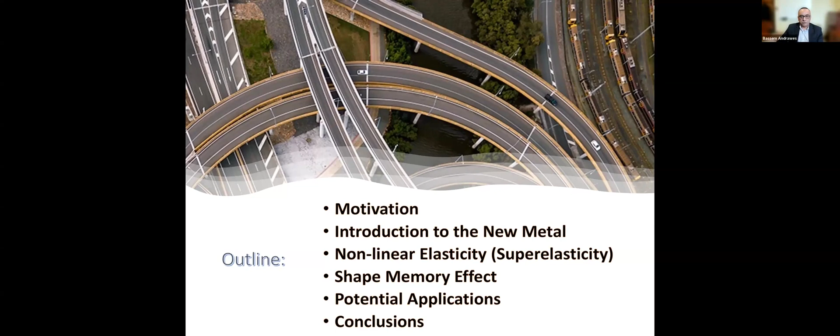Rather than going in one particular application for my presentation, I chose here to go through an overview of some samples of the work that we have been doing through TRANS-IPIC, especially here at the University of Illinois, related to SMAs, that would hopefully give you an idea about the potential of these new materials. And then I'm going to wrap up with the conclusions, of course.

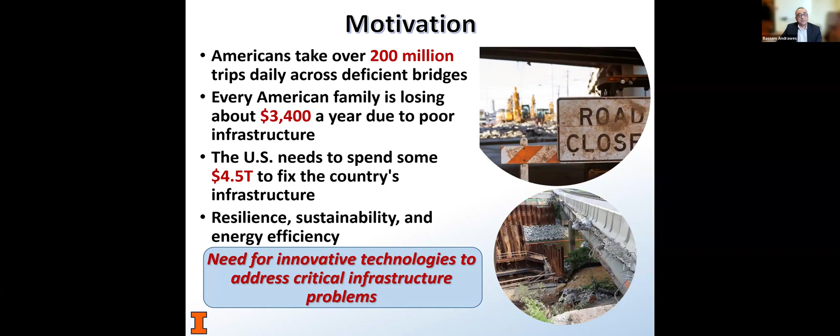These are all keywords that are floating around us whenever we attend a meeting, workshop, or conference, and they are very important keywords that we need to think about very carefully. We need to think about innovative ideas and technologies for the future. We can't just keep repeating the same technologies and expect the outcome to be different 50 or 60 years from now. Therefore, we are thinking about new materials, and that's the area I'm going to be focusing on today.

If I ask you a simple question, what would be the most material you would say is being used in our transportation infrastructure? I'm sure most of you will say concrete and steel, and you're not wrong about that. You're absolutely right. However, these materials are great and have served us well over the last century, even more. But it's not a secret that they have their own shortcomings and limitations. For example, concrete cracks in tension.

Steel corrodes. The concrete cracking even exacerbates the issue of steel corrosion. Steel yielding, some of us think of it as a blessing, which is surely a blessing for ductility, but when you think about resiliency, it's actually against resilience by definition. Also, these materials are stiff, rigid. They lack versatility and adaptability to the surrounding environment, whether it's the loading environment or even climate.

Now we're becoming more and more aware of the cost on the environment that producing these materials have. It's unfortunate that when we drive on our bridges here in the US and see images like the one I'm showing here in this slide, we become numb to it. We could become used to it. It shouldn't be the case, and we should definitely strive for a better outcome for our next generations and next generation of transportation infrastructure.

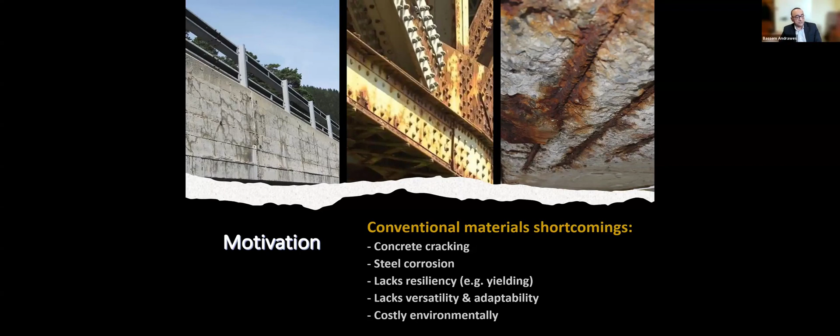Therefore, we started thinking about emerging and new materials like shape memory alloys. Let me declare very early on, we are not suggesting or proposing to replace existing reinforcement with these metals or materials, but rather to supplement existing reinforcement with them. Hopefully the examples I'm sharing today will highlight exactly what I mean by that.

So when we say new metal or SMAs, if you see it or feel it, it looks like any other metal. However, the unique thing about it is that if you deform it beyond its elastic range, the material can actually remember its original shape when subjected to temperature.

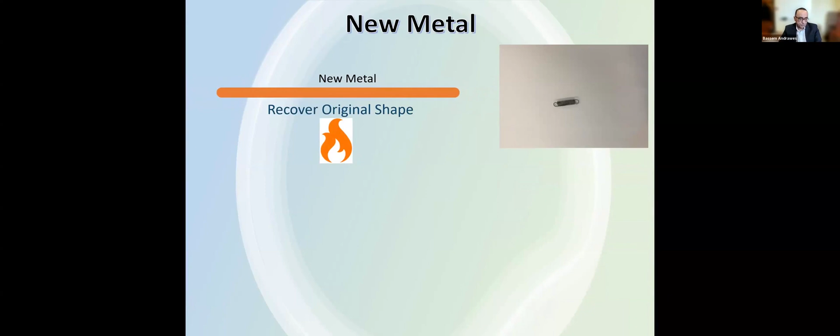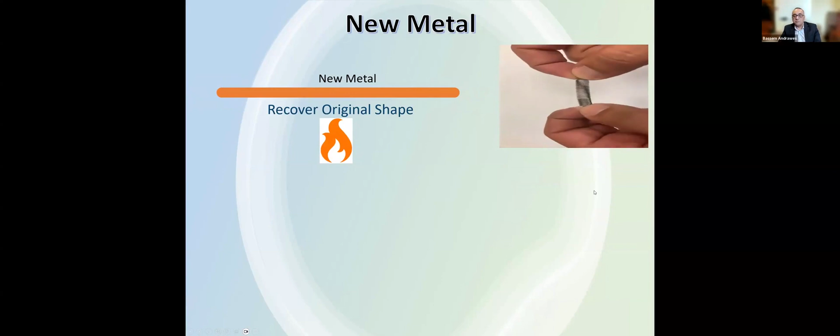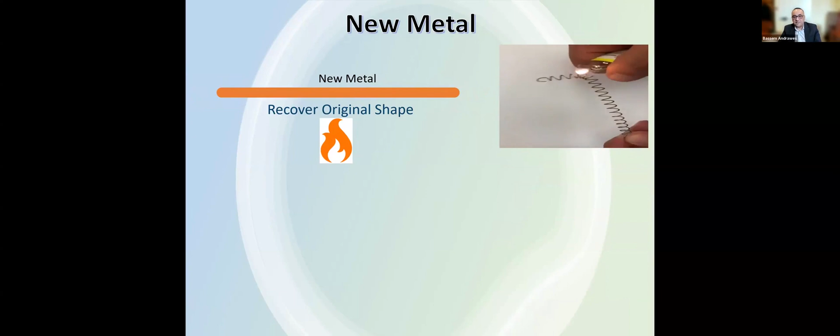If you haven't seen this in real life, I have a video here that shows me stretching a spring made of SMA beyond its elastic range. You'd think it's permanently deformed. However, wait until you see what happens when I subject it to some heat through this flame. It immediately starts recovering its original shape. The thing about it is that it can do this over and over again, the same spring. So it's a repeatable process.

SMAs are not new. They have been used in high-end fields for decades now, fields like aerospace, biomedical, and robotics, and they are becoming more popular than ever when it comes to commercial availability. They are found in the form of wires, bars, and sheets.

One important thing I want to point out is that SMA is not one type of material. It's actually a group or family of materials that exhibit more or less similar behaviors. For example, we have the nickel titanium family, from which nitinol comes, the most popular commercially available alloy on the market. We also have copper-based alloys and iron-based alloys, which really got civil engineering folks excited about using SMAs because they are more cost-effective. Our role in civil engineering is to choose the right alloy, or alloys, that work for us not only in cost but in durability and resiliency as well.

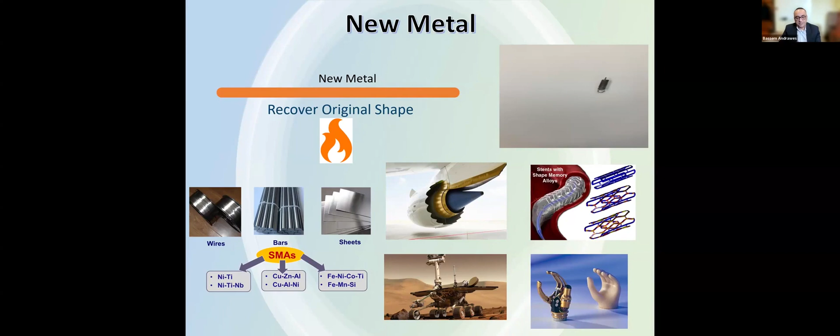Let's delve a little deeper into the mechanical properties of these materials. First, I want to make it very clear that when you say SMAs, you have to identify what type of SMA you're referring to: is it superelastic or shape memory? They are two completely distinct behaviors that cannot coexist, by the way, and I sometimes see confusion about this.

We're used to the terms linear elastic or nonlinear plastic. Nonlinear elastic is not a very common term to use, but that's actually what this is. It has all the features, from damping to self-centering to ductility, that excite earthquake engineers and researchers to study and use it. That's what this behavior is very popular for, so most studies out there focus on that type of alloy for earthquake engineering applications.

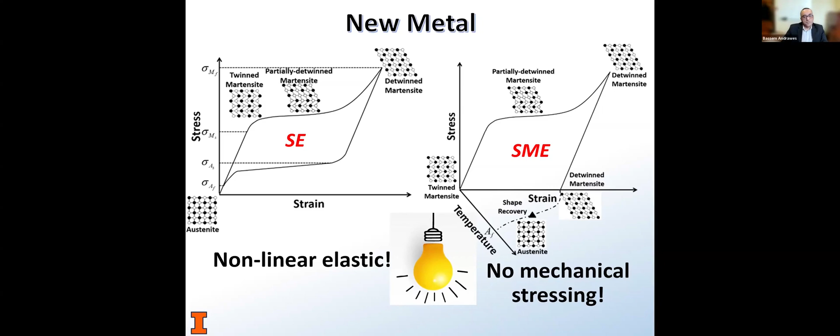The great thing about this is that if you subject it to that temperature while restraining it, it will pull back very strongly, trying to remember its shape. The force developed during this pulling process is called the recovery force or recovery stress. This really triggered the idea in many minds of using it for pre-stressing, thermal pre-stressing, without the need for hydraulic jacking or any anchorage system. That's the unique thing about this, and hopefully in the examples I'll show you today, you'll understand what I mean.

Going back to the superelasticity, for those who are not sure about the self-centering capability, what does this mean? This is a simple beam. We're subjecting it to bending. It has two SMA superelastic bars inside. Look at the crack forming in the middle. Well, that's expected, of course. But wait until you see when we remove the load, because it's cyclic loading, the crack will start closing. And that's what we mean by self-centering. The beam has the ability to recover back to and bounce to its original shape.

See how wide the crack opens? You think it's done, but watch when the load is removed, the crack is closing. That's the beauty about the self-centering or recentering. Look here at the CMOD, the crack mouth opening displacement. It started taking that nice flag shape hysteresis. Eventually it failed in shear because we didn't actually design it to have shear reinforcement, but you got my point.

So self-centering has found its way in applications like rebars and plastic hinges for bridge piers, or in moment-resisting frames, or even bracings for seismic frames. You will find a lot of research in that direction.

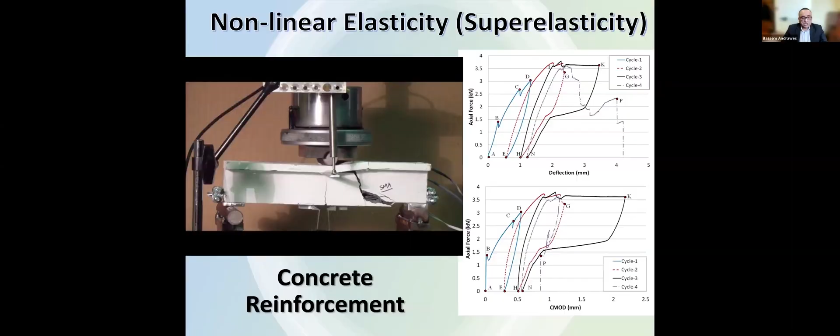Switching to the, as I said, a little bit less studied and less understood phenomenon, which is the shape memory effect and how it could really be used for thermal pre-stressing.

Let us start here with, for example, bridge piers. I'm showing a few examples of issues that we have seen in the past, either during earthquakes or even issues with the construction of seismic structures, like with high steel congestion. A lot of these problems could be attributed one way or another to the transverse reinforcement.

Now let me ask you this simple question. Can you imagine having a transverse reinforcement like a spiral, for example, or a strip inside a beam that is pre-stressed? How can you even start thinking about pre-stressing a spiral inside a column? Well, it's very difficult, and even if it's achievable, it's not a very simple process, until we started thinking about the thermal pre-stressing that we can use for doing that.

The process is very simple. We have pre-strained wires or bars made of SMA. It's delivered already to the site in the pre-strained condition. You form it as a spiral, put it in the form, and cast the concrete. When the concrete sets, you now can activate it by subjecting it to temperature. It will attempt to shrink, it will try to squeeze the concrete, and that squeezing effect we call lateral pre-stressing, transverse pre-stressing, or sometimes active confinement.

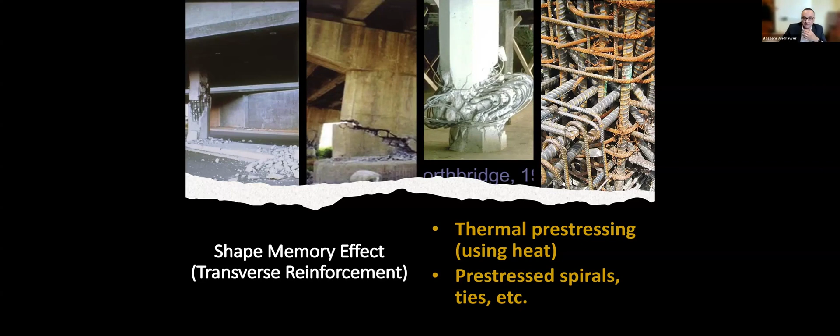So that is the unique thing about these materials. One could argue, how does active confinement really behave, or how does this differ from passive confinement, which is the conventional transverse reinforcement we're using? Well, I have this simple example here for you to compare both. We have two identical cylinders, identical in everything except that the wraps on the left are made of steel, basically, and the wraps on the right, this is like an SMA spiral.

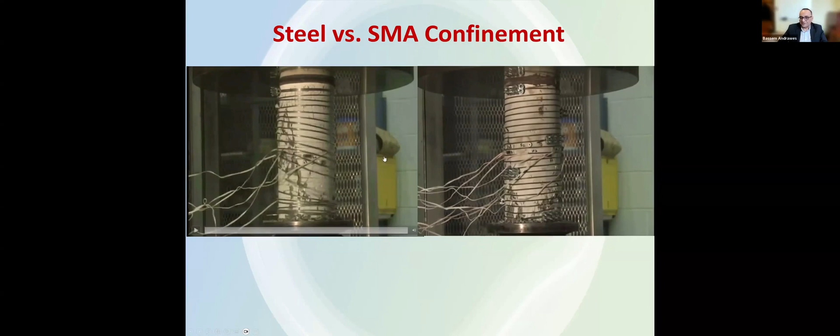So I'm going to run both of them simultaneously here. We conducted a cyclic test, compressive test, basically loading and unloading. I want you to watch the progression of damage in both specimens. See here the shear diagonal cracks forming right away very quickly, and then boom, the fracture of the spiral. While here, watch the plate on the bottom just compressing, squeezing the concrete and unsqueezing. It's like a pillow. So before your own eyes, you can see the concrete being squeezed.

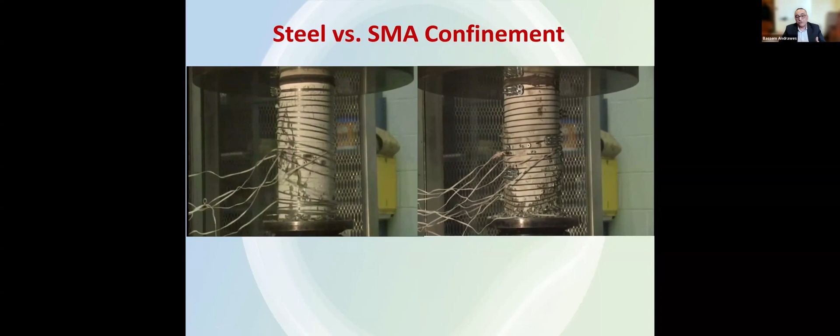Only a 2 millimeter diameter wire that you are able to wrap with one hand is able to do this to the concrete. And by the way, this is not special concrete, it's just regular, normal 4 or 5 KSI concrete. The effect is significant. Of course there is some effect on the strength, as you can see from this stress-strain curve, but more importantly, the additional ultimate strain that we gained, which translates obviously to additional ductility.

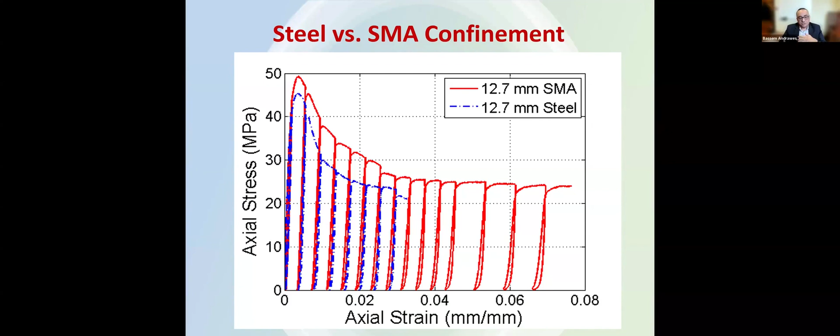So we wanted to look into this more deeply at the column level. We have two columns, the one on the left wrapped with the SMA spiral, again active confinement, and the one on the right with passive confinement using glass fiber reinforced polymer. The FRP started well at the beginning; however, we started seeing early compression failures, crushing essentially of the concrete, and then what looks like an explosion at the plastic hinge of the columns.

While the one on the left, no matter how much we pushed it, we even maxed the stroke capacity of the actuator and still didn't see any fracture of the spiral or crushing of the concrete. That was an amazing amount of ductility that this column exhibited.

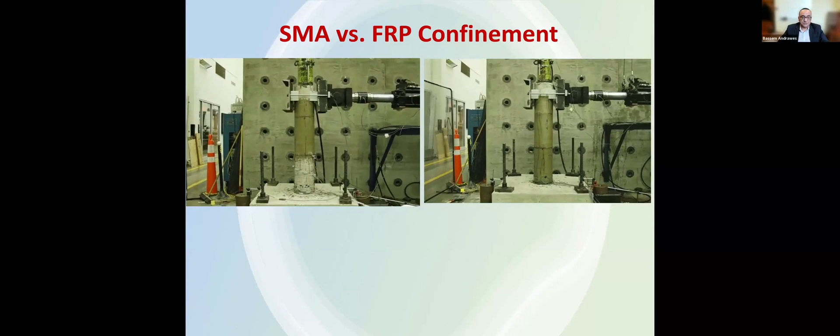Not only that, when we uncovered the columns and took all the wraps off and inspected the concrete underneath, for the case of the FRP column, almost half of the cross section was completely gone. It's unusable. While the one on the left, yes, there are damages, but it's in a much better shape, which will affect the post-earthquake functionality and the repairs, the downtime, and all this important stuff that decision makers and bridge owners have to make after an event like an earthquake.

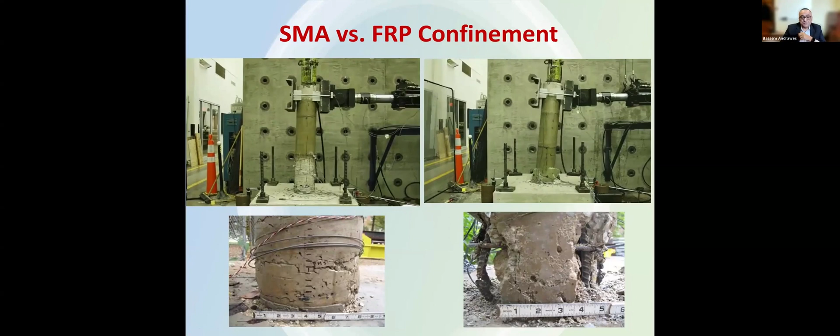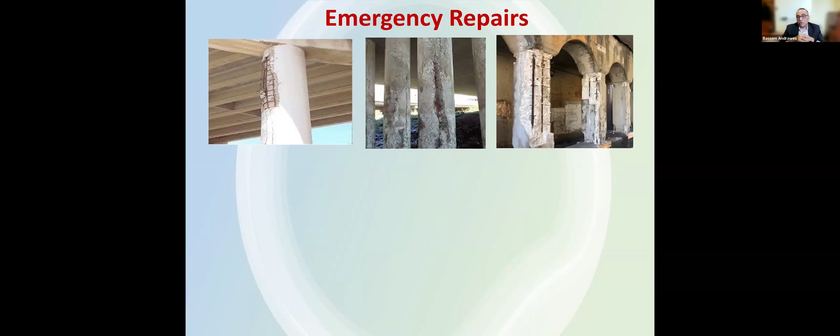Speaking of repairs, we started thinking about using these materials not for permanent repairs, but emergency, quick, even temporary repairs after events like earthquakes or hurricanes. We know that will require a very quick act. So we wanted to test this in case you have a main shock hitting a bridge and damaging it, and you're not sure whether the bridge should be kept open for emergency vehicles or should just be closed. So we wanted to test this concept with just these small SMA wires.

We had one of our bridge columns that were tested in our lab, severely damaged. Two of the rebars were even fractured. So we coupled it with two couplers. We injected epoxy in the cracks, applied fast-setting mortar, and then wrapped it with SMA at the plastic hinge zone.

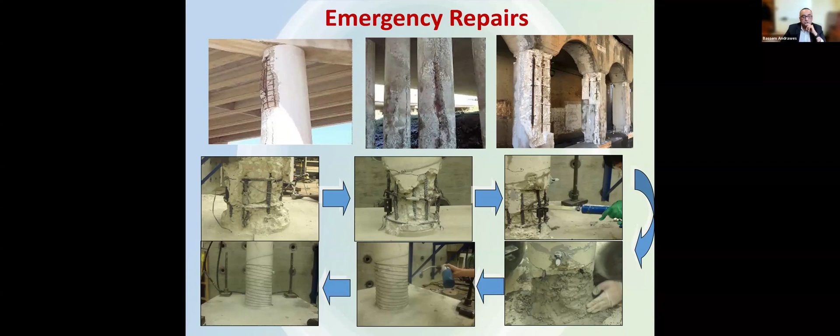You see here my former student just applying, with a blowtorch, just heating it. In a matter of seconds, you see the spiral, even before your own eyes, attempting to squeeze the column and apply the confining pressure. So we wanted to test this concept under actual dynamic load effect.

The best way to do this is through a shake table test. That's actually the only way to do it right now in our labs. So we took one of the columns that were damaged, and the damage here is in the form of cover spalling and exposure of the internal steel hoops. We performed that repair process, and it took about 2.5 hours to complete. Then the column was ready for testing.

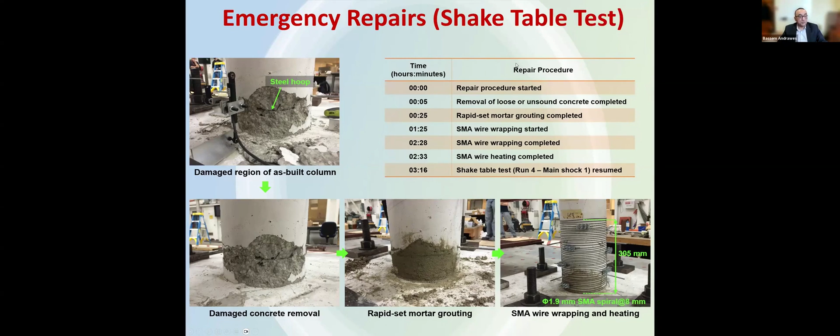So we conducted tests on two columns at the same time. The top one was not damaged; that was retrofitted from the beginning. The bottom one shown to the right is damaged, then repaired, then tested. We subjected both columns to a record, bi-directional record from the Loma Prieta earthquake. I want you to watch here how both columns behave together.

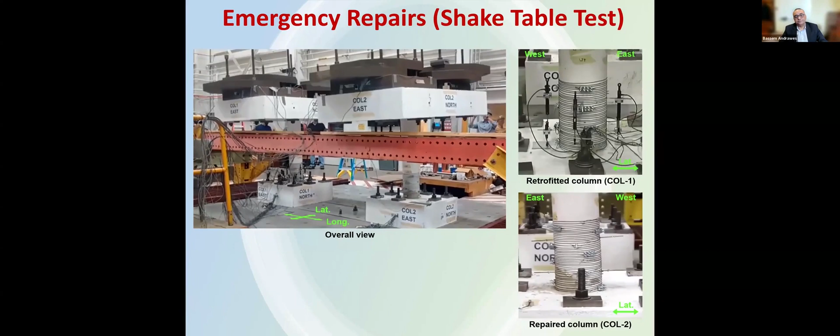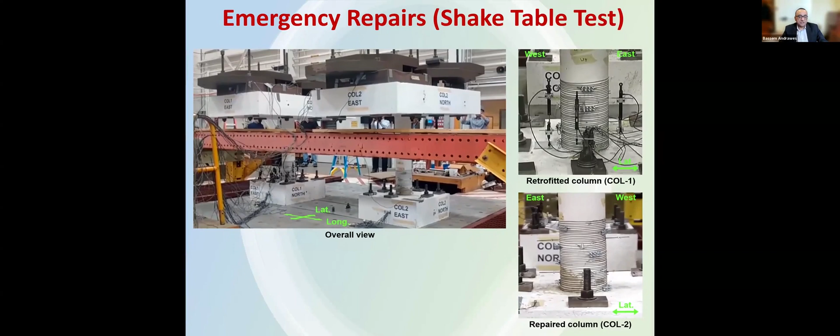You will notice here that both columns were behaving almost identical. The capacity of the damaged column was restored. Its ductility was improved significantly, just with 2mm wires in a matter of 2.5 hours repair. So definitely that was a great, successful test here, showing the potential of these materials for active confinement.

Let's switch gears a little bit and talk about another important component in bridges: precast pre-stressed girders. One of the issues that's still lingering when it comes to these precast components is the transfer of the pre-stress and the effect it has on the end region. We see in many cases, unfortunately, these end splitting cracks, especially in cross sections with skinny or thin webs and wider flanges where there's a lot of pre-stressing force transfer.

There's been a lot of research in this area, so it's not a new problem. There's no one quick, 100% fix for it yet that satisfies everybody. When it comes to AASHTO or PCI guidelines, they provide recommendations for using a lot of transverse reinforcement at the end region, which makes a lot of precasters unhappy, unfortunately.

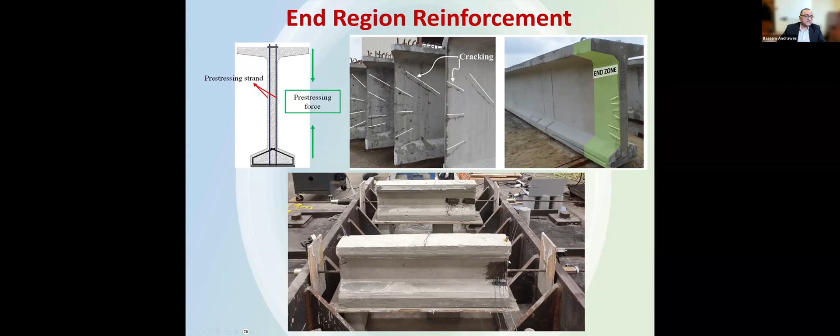So we tried a new concept: how about if we simply apply transverse pre-stressing by throwing in a couple of end stirrups made of SMAs? We tried this concept on a small scale, specimens like this, looks like an AASHTO type girder. And we only used one stirrup, number two stirrup made of SMA, two legs.

We found that we are able to apply a transverse pre-stress that reaches about 0.9 KSI or so, which our analysis showed that with this amount, we're able to almost eliminate all transverse cracks or splitting cracks that we see there. We are actually going to be presenting on this topic next month at the ASCE Structures Congress, and we're now pursuing more testing to validate this concept.

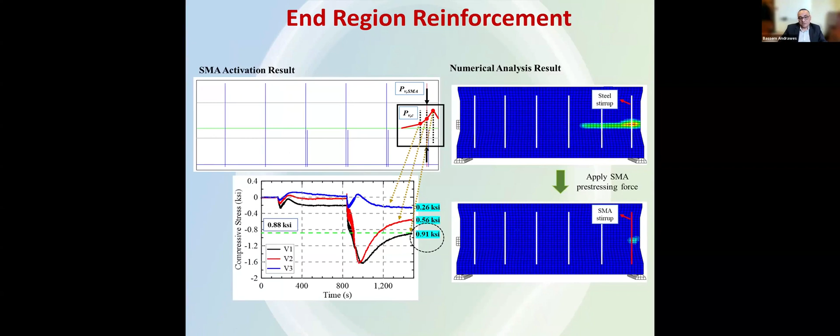End region issues aren't only a problem during pre-stress transfer. We see this all the time in existing bridges, due to leaking de-icing material or water through the joints and bridge hinges. Now the question is, should we replace the beam, or can we restore the capacity of the beam? DOTs and transportation agencies are faced with these questions all the time.

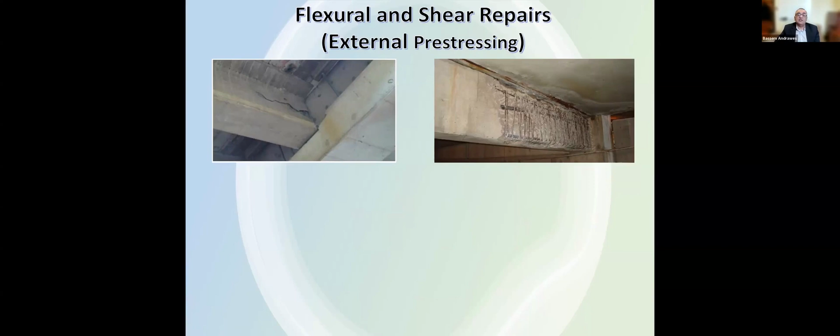External pre-stressing is one of the great techniques for restoring capacity. However, for a tight region like this, it becomes very difficult because of the need for large equipment, hydraulic jacking equipment, and even anchorage blocks. So we came up with a very simple concept.

It's called the precast pre-stressing plate, or PPP concept, where we have a precast plate fabricated somewhere else, with a coil of SMA that's pre-strained but not activated yet. You place it in that plate, ship it to the site, and mount or attach it to the concrete surface where repair or strengthening is needed—for example, a web or a flange. It could be a very tight region because you don't need any anchorage block or system. Once it's ready, you apply the pre-stressing force by simply heating the wire inside the plate, and the pre-stress transfers to the substrate or surface underneath.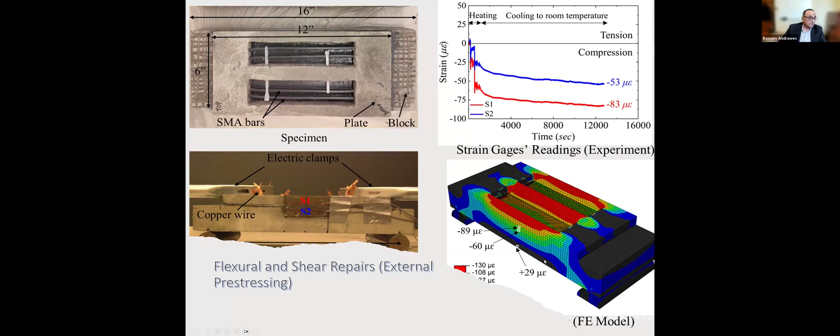When we activated the four wires, we found quite a bit of pre-stress transferring to the block underneath, which was a great outcome. We even tested that block in flexure, and both strength and ductility improved tremendously, showing improved behavior because of the pre-stressing that's transferred.

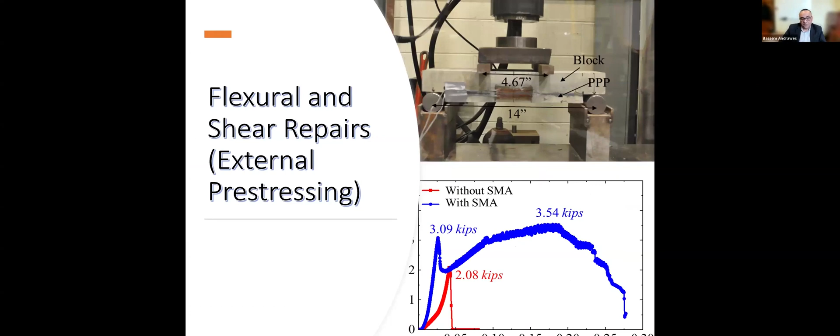The most recent test we conducted was a large-scale test using this same concept with some variations, called the coupled pre-stressing plate, or CPP. This is, I'd say, the first test of this size and scale using SMAs done in the US. The idea is simple: we have two plates, not connected, but coupled with SMA reinforcement running between them. These are precast plates, and we can supplement the reinforcement with some steel to cut down on the cost of the SMA material.

You simply attach these plates to the soffit, in this case of a PPC deck beam—essentially a box beam with some cracks that we wanted to repair and strengthen. We used epoxy with some anchorage applied as well. Once ready, we activated it with a blowtorch, and in a matter of seconds the pre-stress transferred to the bottom of the beam. We saw cracks closing and an increase in elastic capacity by over 50%—amazing results.

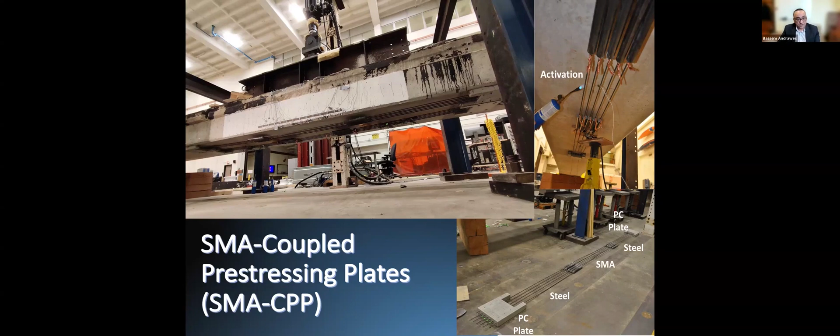Let's switch to another transportation mode now, leaving highways and moving to railroads. They have their own set of issues and problems, especially with precast, pre-stressed concrete ties, like end splitting crack problems and center region cracking problems.

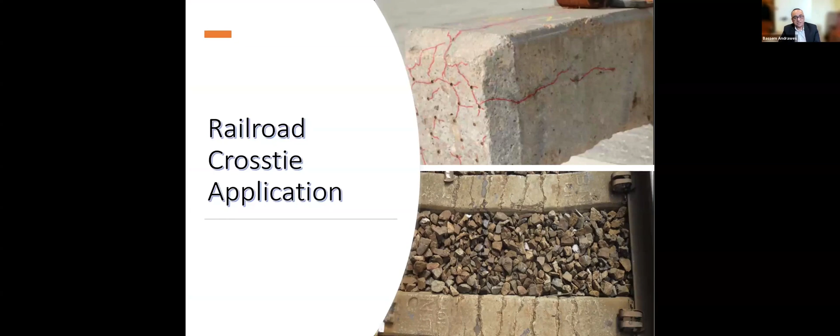So we started having discussions with experts in this area, especially working with Rocla Concrete Tie, one of the leaders in developing these ties in North America. We told them, how about eliminating the top layer of your post-tensioning wires? That would help alleviate some of the stress at the end zones, which would help with the end splitting crack issue they have.

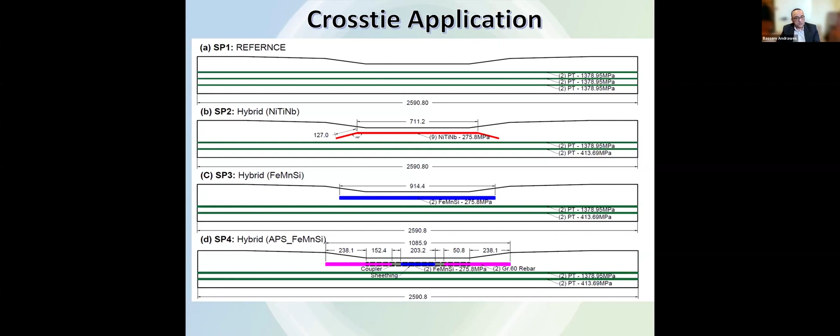We could also add localized pre-stressing using SMA bars just at the center region. We tried different configurations, visited their plant in Florida for a couple of days, and worked with them on implementing this technology in their ties.

And once the concrete was cast and set, they shipped it to us for testing. It was a very fruitful and exciting experience we had with Rocla Concrete Tie.

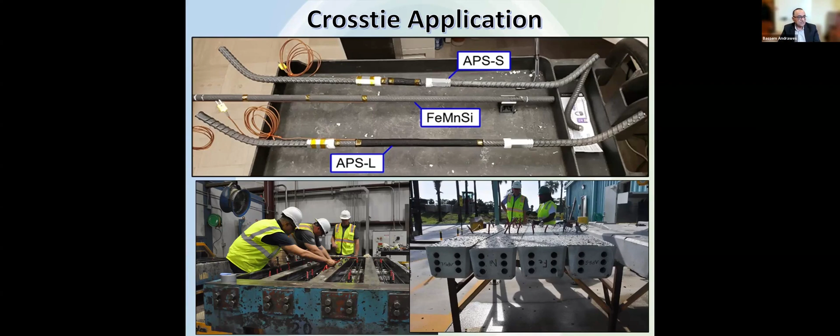Now, the question some of you might be wondering about is: okay, you have the SMA inside the concrete, everything is great, but how are you going to heat it up? The quick answer would be we're going to have cables connected to the SMA sticking out of the forms, and when we need to heat it, we just connect it to a power supply and electrical resistivity will do its job, right? Yes, but we wanted something less complex and much simpler.

So we thought about induction heating. Some of you might be familiar with this technology. The idea is very simple: you have this coil that generates an electromagnetic field, and if a magnetic metal happens to exist in that field, it will actually run a current in it, and that will heat up the material.

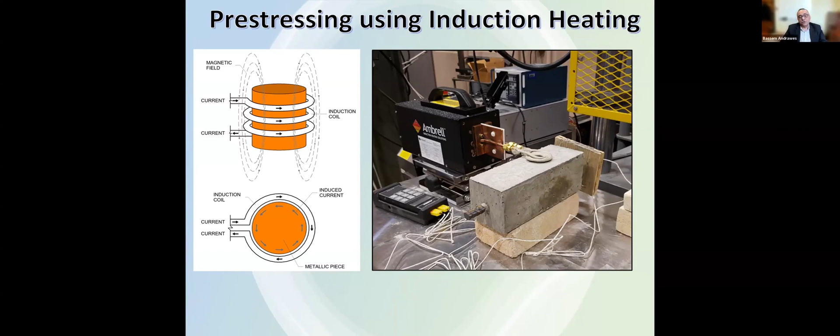So we're able, just by scanning the top surface of this concrete block, to heat the bar inside and make it reach about 200 or even 300 degrees Celsius in a matter of a few minutes. That was an exciting technology that we wanted to explore in TRANS-IPIC.

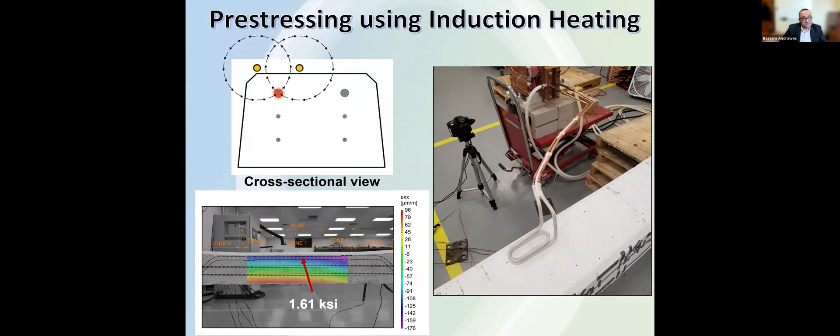What we did was basically heat the SMA inside these ties with this coil. We were able, just by scanning the top surface of the concrete without even touching the SMA inside, to reach pre-stress at the top fiber as high as 1.61 KSI, which resulted in a moment cracking capacity that exceeds even the AASHTO requirement. That was a very exciting thing to see here.

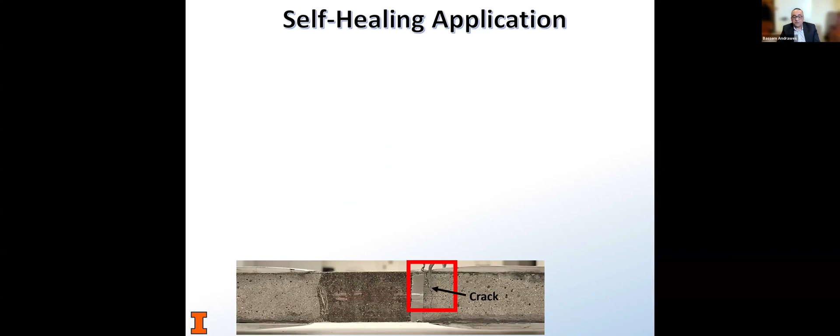The same concept could be applied for self-healing, something we've been thinking about. There's been a lot of studies in other areas, but now with SMA, imagine having a crack of this size with SMA bars inside. Whether it's pre-stressed or not, if you heat it again, that's what happens.

This is exactly a specimen with SMA inside, and we heated the SMA. Some of you might not even see where the crack is. That, of course, will help significantly improve the durability of concrete.

So our group will be giving a talk next month at the ASCE Structures Congress in Phoenix about these self-healing applications and the research we've been doing with SMAs.

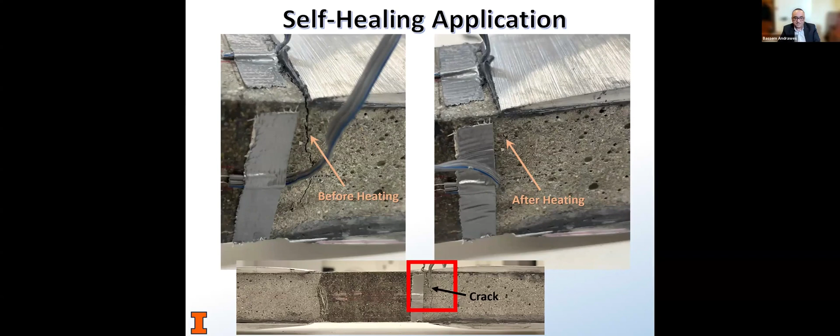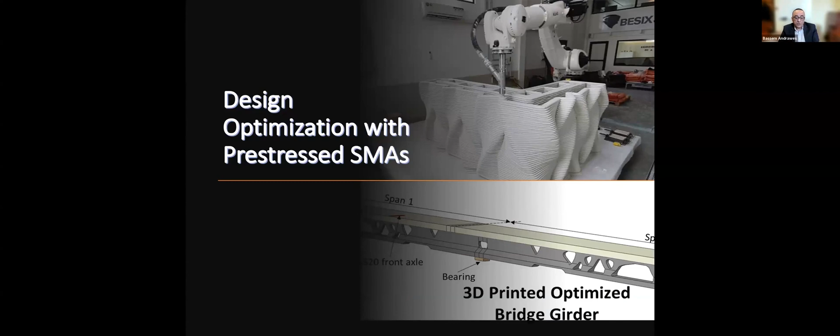The last thing I want to touch on, and I won't spend much time since we're limited on time today, is design optimization using SMA pre-stressing. In an era where 3D printing and additive manufacturing is growing significantly, showing us how we can produce more efficient and optimized cross-sections that used to be very complex to produce, we thought about applying this to conventional bridge girders like AASHTO type girders.

So we conducted what we call a topology optimization process, where we basically remove material from locations where it's not needed much, and keep it where the stresses are high. We end up with a quite complex geometry like this. Maybe with 3D printing we can argue that we can now fabricate something like this more easily.

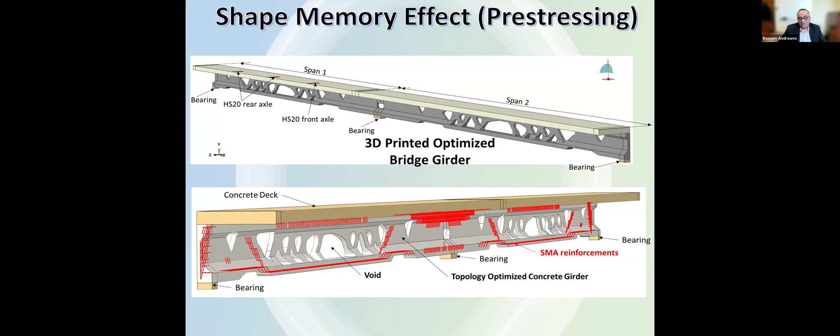However, the problem is these red zones you can see down there are highly tensile zones that need pre-stressing. With these zones being discrete like this, we cannot apply our conventional post-tensioning or pre-tensioning. But with thermal pre-stressing, it's becoming more and more feasible to pre-stress these localized regions.

So we wanted to try something simple, a simple optimization process, the simplest form of which would be a truss. We performed some analysis on trusses. Trusses are more popular in steel than concrete, simply because tensile members in trusses will have to crack if made of concrete unless you pre-stress them, right?

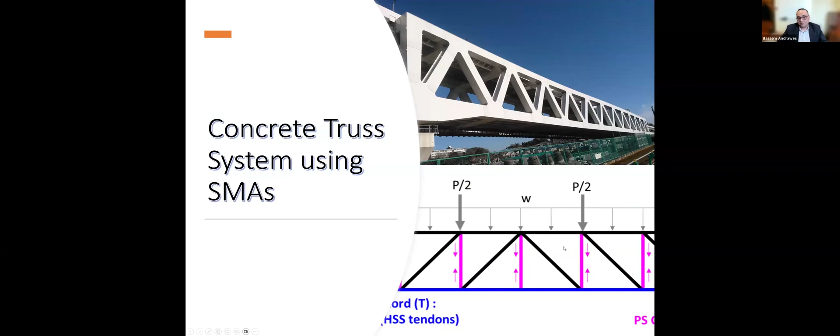Pre-stressing each and every one of them is a complex process. For example, in a truss like I'm showing here, the verticals are subjected to tension, so we have to pre-stress each one of them. With thermal pre-stressing, that's possible. So we conducted this theoretical experiment on a truss like this with only the SMA placed in the verticals.

The great finding was that we were able to meet the AASHTO strength limit states while still cutting the amount of material by over 25%, along with the CO2 embodied in the production of these materials.

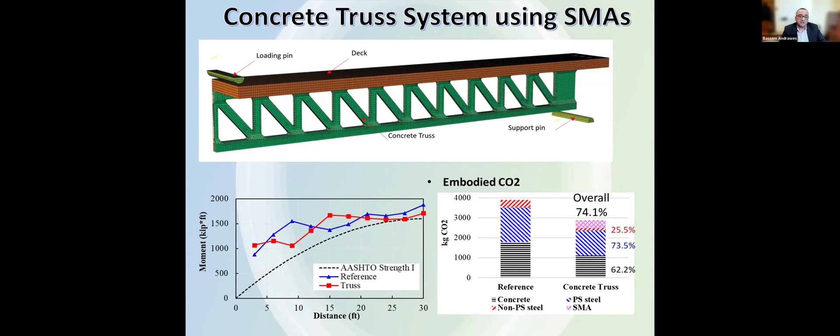So there is potential there, no question about that, and we are now working on validating these results experimentally.

In conclusion, SMA is a very exciting and new field that's emerging. It's a new material that we're not suggesting replacing steel with, but supplementing reinforcement with it. Because as you can see from the examples I showed today, it could actually enhance the durability and resiliency of structures just by using a small amount of the material at the right locations.

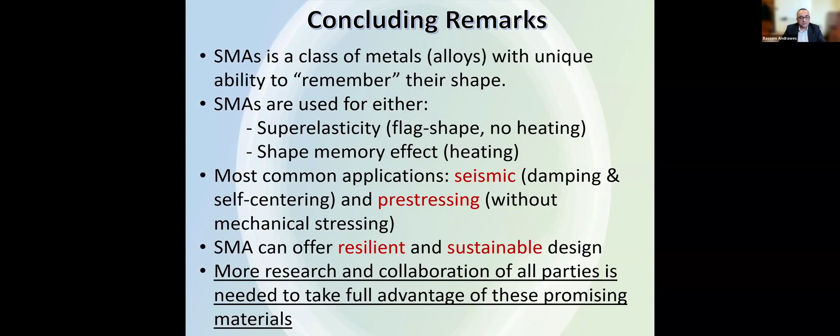The two exciting features of SMAs are the flag-shape hysteresis, which is the superelasticity, and the shape memory effect, which we have been demonstrating how it could be used for thermal pre-stressing. As I said, this is a new field, and we're just scratching the surface here, and there is a lot of room for collaboration and for innovation.